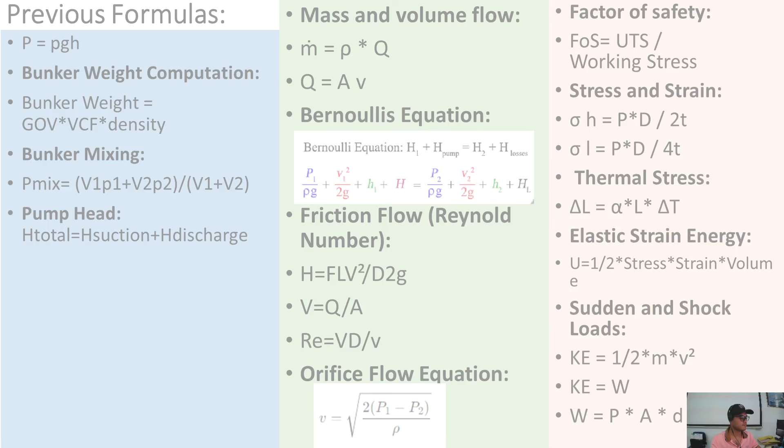So our next topic will be Learning Outcomes 3.2: solve problems involving torsion of shafts in engine room, pneumatic and hydraulic system. Our topics are fundamental torsion equation, torque stress relationship, modulus of rigidity, shaft torsion applications, torsional resilience, maximum and minimum torque in reciprocating components, crank effort, hydraulic steering gear, and helical spring.

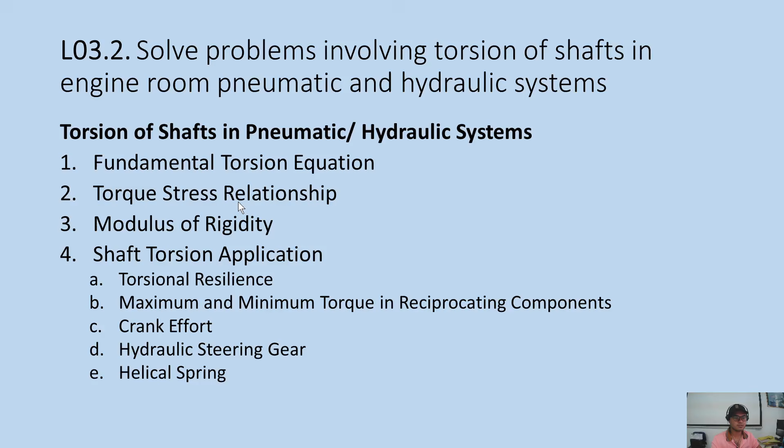Okay, let's start with torsion. Torsion acts to twist objects and material. It's the attempt to rotate the different parts of a material in opposite directions. So this part rotates clockwise, and this one is counterclockwise, so twisting happens. That is torsion. Usually this happens in shafts, in propellers.

For example, we have a propeller shaft here, so twisting or torsion happens there. Propeller shafts connect a ship's engine, here is the main engine, to the propeller which spins in the water and drives the ship forward. So these shafts have to be able to resist torsion, allowing them to transfer rotary motion without breaking or twisting.

So the material should not twist. The seawater applies a rotary force in the opposite direction to the engine, so a twisting force is applied to the shaft. The shaft needs to be able to overcome the twisting or torsional force happening to it, so you need to calculate it.

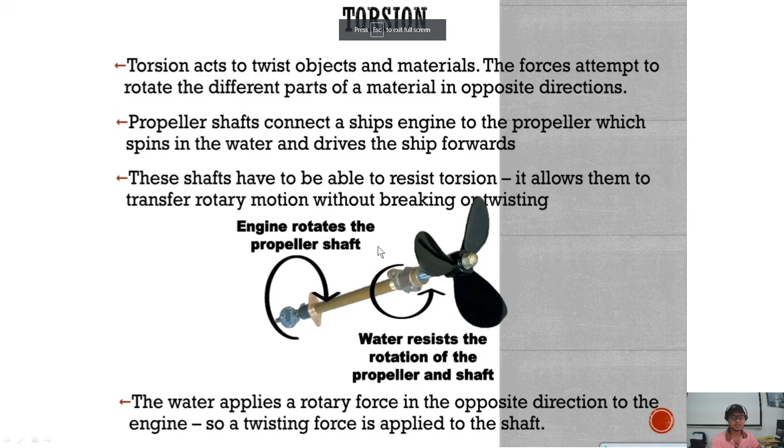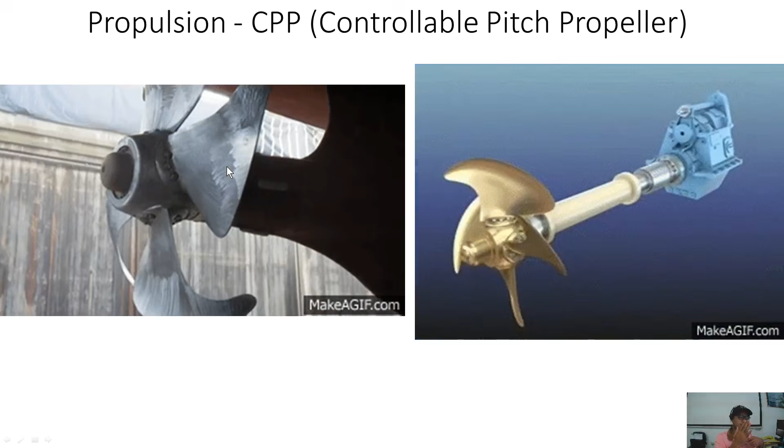Okay, ito yung dati, may mga bago ngayon na electric yung propulsion tawag. Ito yung azimuth thruster natin. Electric siya, driven. Meron siyang electric motor. And then electric din siya umikot or electrohydraulic. Umikot yan.

Yan, electric propulsion. So usually wala nang main engine na malalaki. Puro na lang generator yung nandoon sa loob ng barko mo. And then wala ka ng main engine. Puro generator na lang, may electric motor na malaki na ginagamit for propulsion para din umikot to dito. Meron yang motor din yan sa loob dyan para umikot yan.

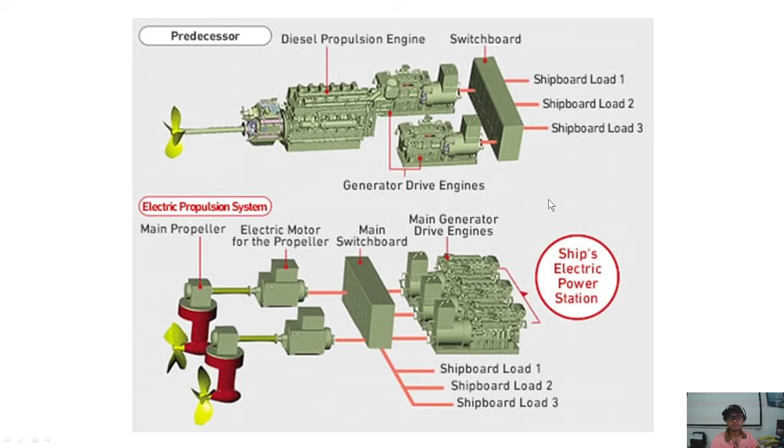Pumps. Of course, sa pumps, meron din tayong mga torsional forces dyan. Kasi as long as may umikot, meron torsional force, di ba? So, dito sa taas, meron tayong tinatawag ang tawag dito is lobe pump. Lobe. So, yan, parang tawag dyan. Parang circular yung dulo. Yan. Lobe. Tawag dyan. Yung iba is, ito, tatlo tong lobe.

Yung iba, dalawa lang. Parang yung mani lang. Peanut. O parang lobe. Ganun yung lobe. Parang letter 8, number 8. Meron din ganun. Lobe pump ang tawag.

So, ito is at lobe pump. Dito naman, meron tayong gear pump. So, gear pump to. Pero since yung isang gear ay sa loob ng isang malaking gear, so ang tawag dito is the internal gear pump. So habang umikot siya is dumadaan din yung natutulak din yung fluid papunta sa kabila. Yun. 'Di ba? Higop dito sa kabila, pupunta doon sa kabila.

Dito naman, walang torsional force dito. This is a diaphragm pump. So meron siyang parang diaphragm dito, yung itim na ito. Yung diaphragm na yan, kung saan siya itutulak, so nagtutulak din siya ng liquid. So pag, example, ito nga side, pag tinutulak siya pa left, so tumutulak siya ng tubig. Tapos pag hinihila naman siya pa right, so nakakahigop naman siya ng tubig sa ilalim. Higop, and then buga. Higop, buga.

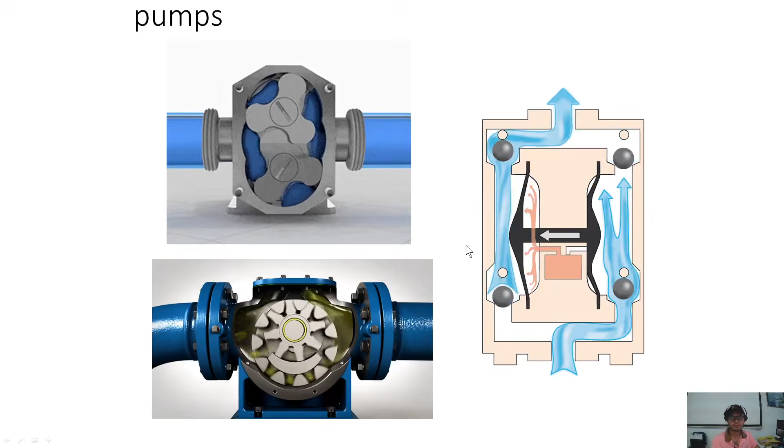So parang ganun yung diaphragm pump. Pero walang torsion nangyayari dyan. Kasi movement niya is axial movement lang. Ito, dito naman, we have here, ano ba to? I think this is a progressive cavity pump. Or kung hindi ito progressive screw pump to, hindi naman sure. So, parang screw siguro. Okay, screw pump. Pwede siya screw pump. So, umiikot siya, meron din siyang axial force.

Dito naman is para siyang isang, this is a centrifugal pump. Yan. Centrifugal pump. Yan. Ito naman, this is a vane ba tawag ito? Vane pump. So ito is para itong blades na yan, or hindi yan blades, parang vanes na yan, is nag-move out pag lumalaki yung area, and then

pumapasok din siya pag wala ng space. So habang yung iba dyan may spring, yung iba is natatapon lang dahil sa bilis ng ikot. So parang natatapon siya palayo dahil sa bilis ng ikot ng lalo na sa mga blower type na ganito, yung mga air driven or air yung tinutulak niya. So hindi siya pump, para siyang blower. So meron ganito mga blower type na nagsa-slide lang yung vane na yan pa outward. Ayan. And then yung hangin is natutulak dun sa kabila. Dahil sa bilis ng ikot niya, natatapon yung vanes palabas. So usually mga vanes na yan is mga gagaan lang, mga carbon lang na vanes.

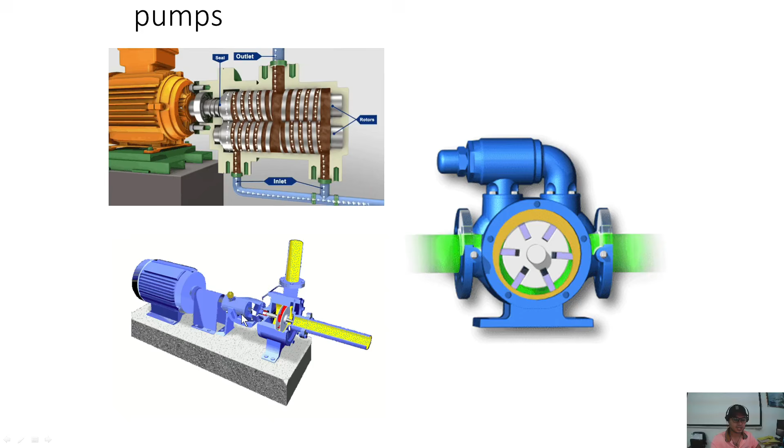Dito naman sa taas, meron tayong relief valve, 'di ba? Pag nag-overpressure dito sa kabila, so pwede siyang mag-recirculate dito para hindi masira. For example, naka-close yung valve dito sa discharge. So pwedeng umikot lang yung liquid, hindi masira yung ating pump or ating motor. Ito yung motor, ito yung pump, dito yung coupling sa gitna dito. Okay?

Electric motor din. Sa loob ng electric motor, habang umikot, meron din siyang torsional force or torsion or torsional stress.

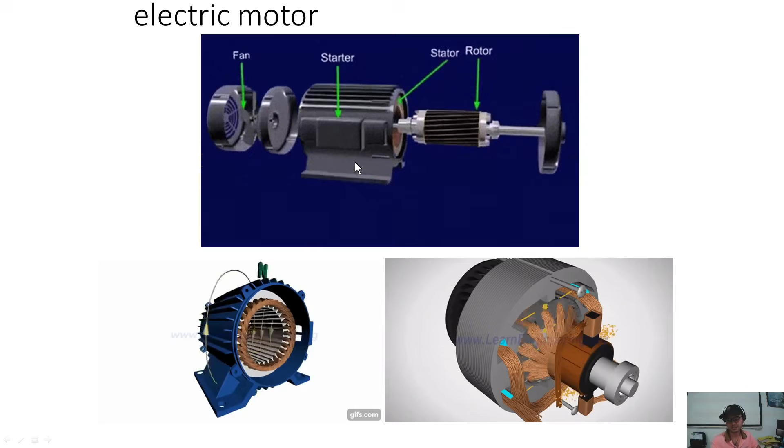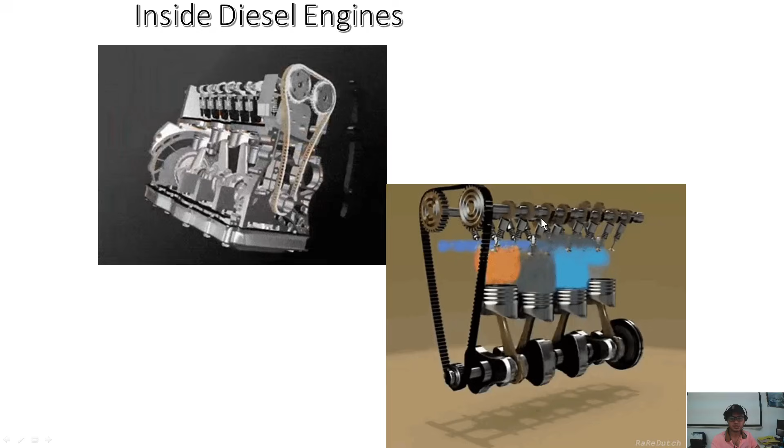So, dito, camshaft. Overhead yung camshaft nila. So, meron yan. Usually, pag ganito, mga overhead camshaft, usually sa mga sasakyan ito. Chain driven. Yan, 4-stroke. Yan, mga 4-stroke yan. So, yan 4-stroke. Ito naman yung 2-stroke. Malaki yung mga 2-stroke.

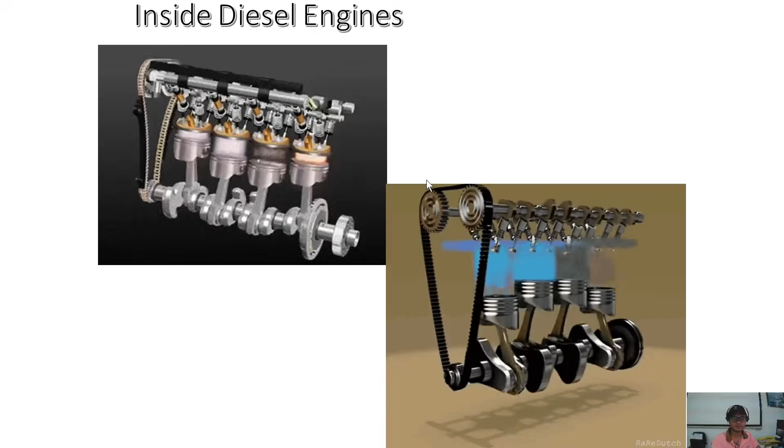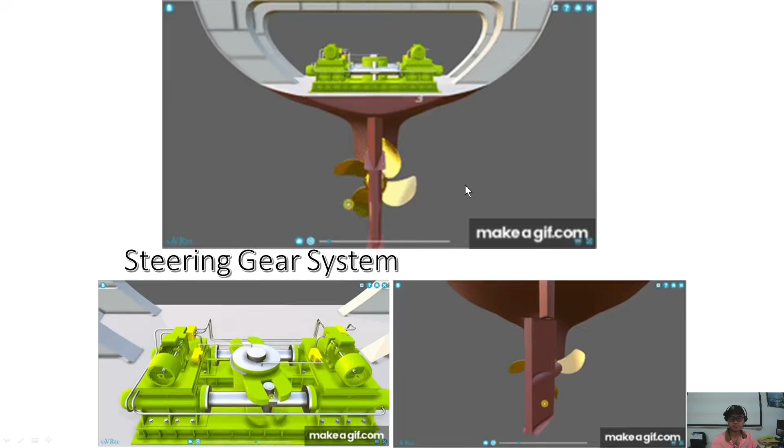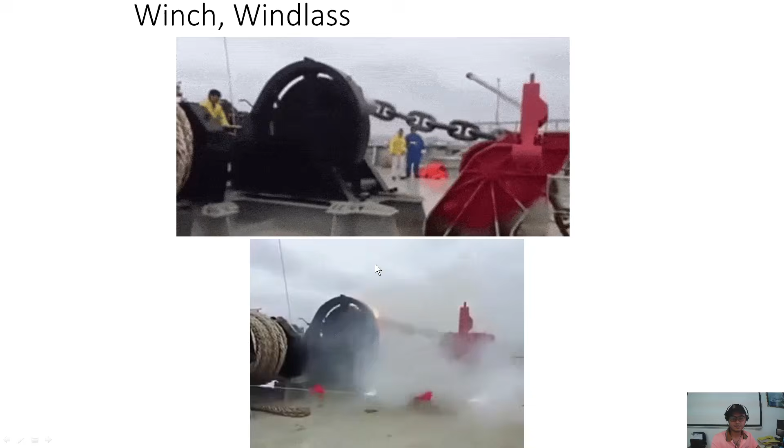Ayan, ito naman nasa loob. Yung chain is binabalik nila sa, parang ito yung locker, chain locker. So, binabalik nila sa chain locker yung mga chain na nilabas nila doon sa anchor.

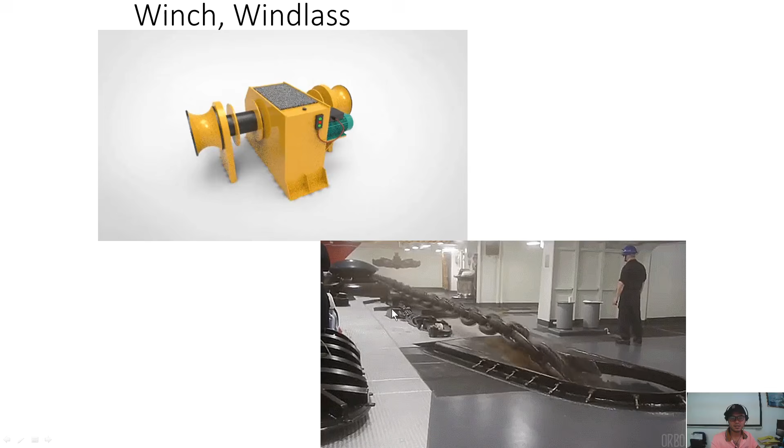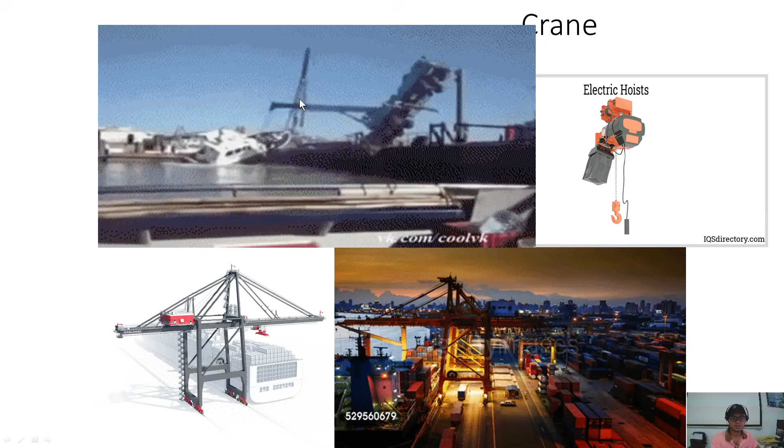So, dito may umiikot. Dito, meron ba umiikot dito? Wala. Yung motor siguro nagpapaangat dyan. Dito, wala naman. Masyadong torsion.

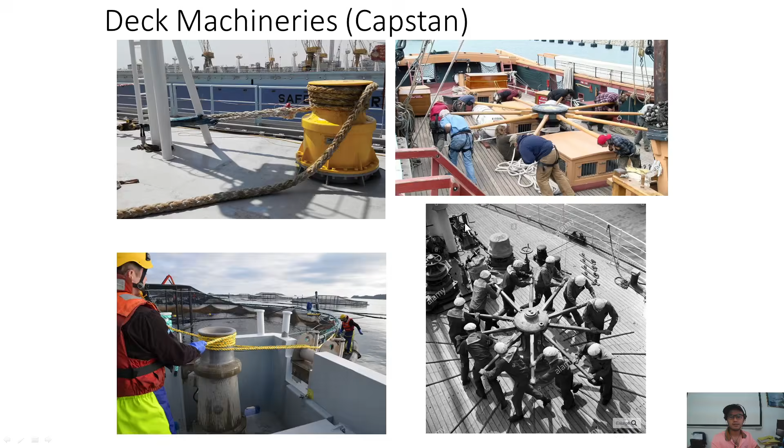Ito naman, rails and rollers. Ito yung rollers. So, dadaan lang yung lubid dyan. Iikot yan. Gagasahan mo lang yan. Wala yung motor. Hindi yan electrically driven. So, manual lang siyang umiikot talaga. Okay, yan. So, syempre, may umikot, may torsion din.

Dito, ito naman tinatawag na roller din to. Roller na cylindrical yung forma. So, sa gitna dyan, papasok yung tali. So, para hindi masyadong ma-pressure yung tali mo, magasgas palagi, mapuputol. May mga rollers. Ang ginagrasahan lang natin yan. Or ng deck. Depende. And ito naman, rollers, reels. Dito nakakabit yung tali. Reels and rollers. Yan.

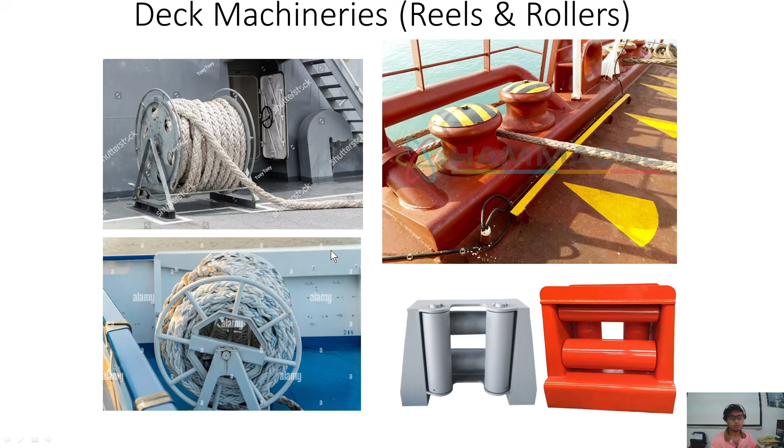So, yan yung mga possible may mga torsion na mga part ng barko natin or ng engine room. Okay. So, yun. So, ngayon, tingnan natin yung fundamental torsion equation.

So, ito yung equation natin for torsion. Torsion is equals to, or torque, T, is equals to modulus of rigidity times the polar moment of inertia times the angle of twist in theta or radians divided by the shaft length. So, L is the length. Okay? So, makita natin dyan, mas mahaba yung length, mas hihina yung torsional force. Diba? So, yan. Pag mahaba, yan. Tapos, yung torque is mas, ano to?

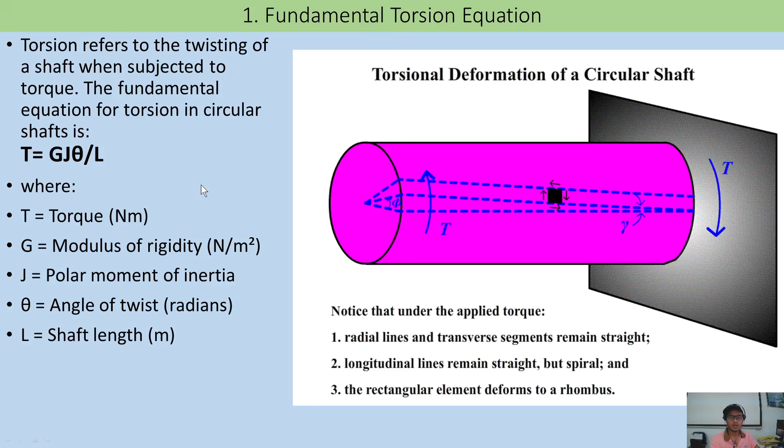So, that is the formula. Okay, yan. And then, meron din tayong ibang formula na parang, ito na kasi is derived formula na to. So, meron din tayong formula, hindi pa derived. This is the formula. Okay? Shear stress divided by radius is equals to torque divided by the polar second moment of area, which is equals to G modulus of rigidity. Yan, modulus of rigidity times the angle of twist or theta divided by the length.

So where for a solid rod, J is equals to pi d to the power of 4 divided by 32. So yan. So G is modulus of rigidity or shear modulus. So shear modulus din tawag sa iba. Yung J is polar moment of inertia or M. Yan, moment of inertia. T is torque or torsional rigidity. Pwede rin torsional rigidity yan. And itong anong tawag dito? Ano to? Shear stress naman yan. Parang letter T na parang slant also. Yan. So these are the formulas.

Yan. Kami ng formula natin. Okay, torque. So the magnitude of the torque, meron na tayong formula dito dati, force times radius, kung naka 90 degrees yung pwersa mo. Pero pag hindi naka 90 degrees, nakatakilid yung paghila mo, so meron tayong, ito yung original force formula niya, force times radius times sine theta. Depende sa angle ng paghila mo. Pero pag naka 90 degrees naman angle mo, since sine 90 is equals to 1, so good as parang wala na lang siya, parang negligible na lang. Pero pag mayroong given angle, so syempre, solve mo yan.

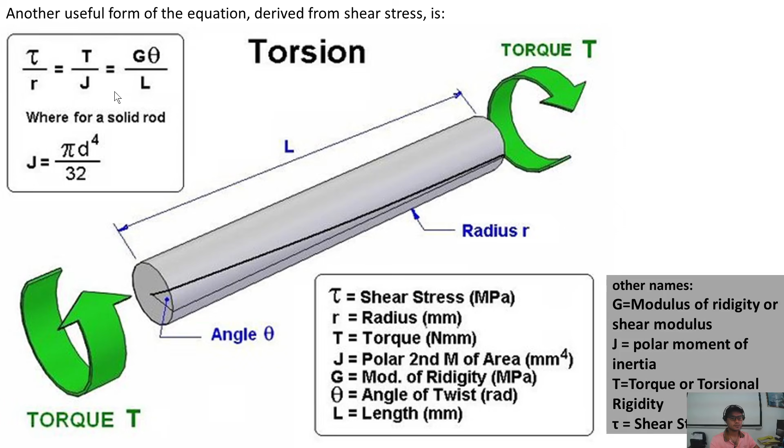So the modulus of rigidity naman is a material property that defines the material's resistance to shear deformation under applied torque. So para makuha mo yung modulus of rigidity equals shear stress divided by shear strain, or tawag doon G equals tau over gamma. So pag dito natin G equals to, wala dyan. Ito, shear stress over shear strain. Another formula.

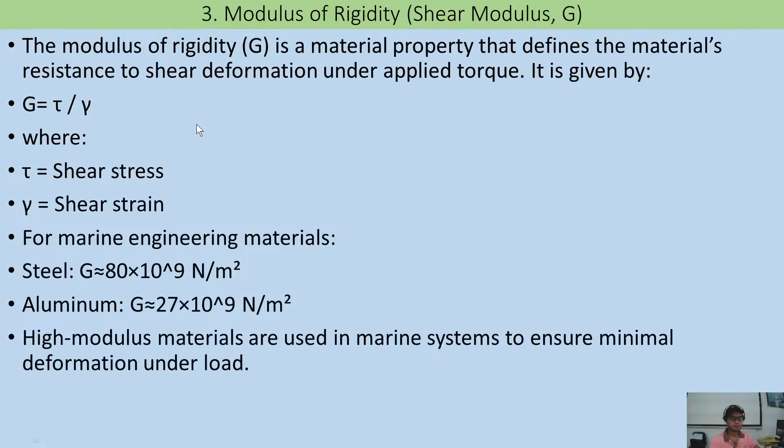So another one, torsional resilience, the ability of a shaft to absorb energy before permanent deformation occurs. So bago masira talaga siya or ma-deform na talaga siya. So meron tayong torsional resilience. Ito yung hanggang ilan yung kaya niya na hindi siya mag-deform yung ating shaft. So yung formula dito is U, which is torsional resilience, is equals to T to the power of 2 times the length divided by 2 times G and J. This property is critical in marine applications where shafts undergo cyclic loading, such as in hydraulic pumps and pneumatic actuators.

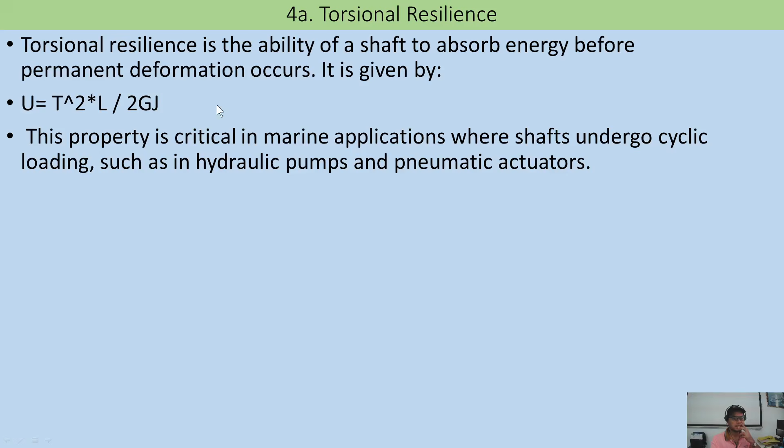Okay, what is torsional rigidity? It's GJ, there are many terms for this. The simplest definition: it is the resistance to twist. So that's torsional rigidity - how much rigidity it has, how much it can resist the torsion or the twist. So that is resistance to twist. Torsional rigidity is the product of shear modulus, G, and polar moment of inertia, J.

So this is torsional rigidity, T equals GJ, right? Let's check. T, let's write, equals GJ. So G is the shear modulus and J is the polar moment of inertia. It shows the resistance offered by material to angular deformation. So this is the twist, this is your torsional rigidity.

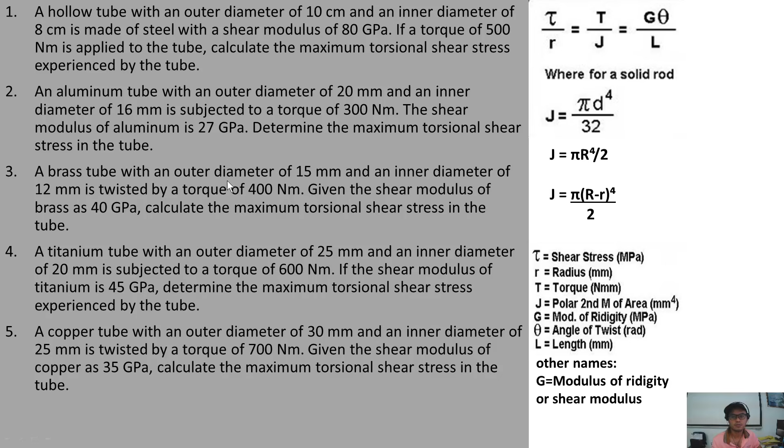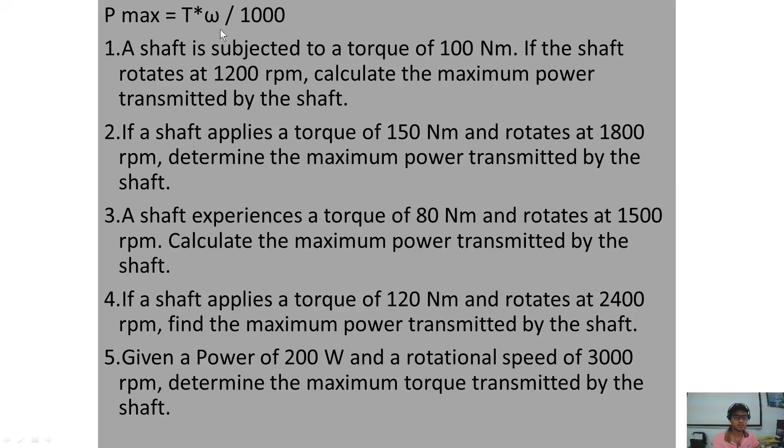So, a shaft is subjected to a torque of 100 Newton meters. If the shaft rotates at 1,200 RPM, calculate the maximum power - Pmax, maximum power transmitted to the shaft. This is easy, just plug in the values: torque and angular velocity at 1,200 RPM, then you can solve it right away.

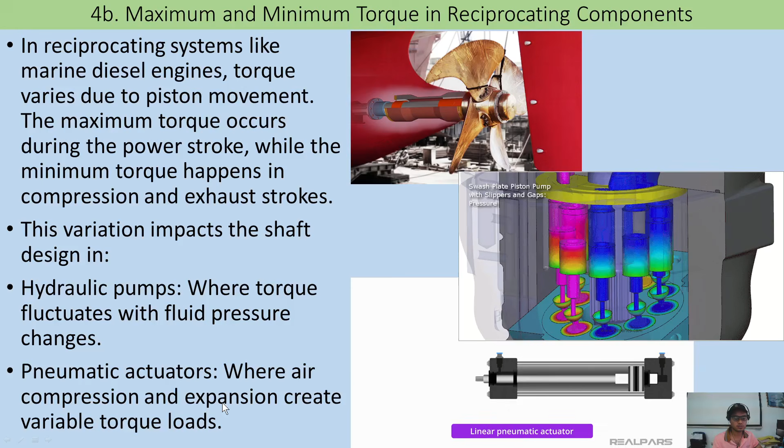Pneumatic actuators where air compression and expansion create variable torque load. So meron ding mga torque loads na nangyayari dyan.

Ano to? Crank effort refers to the torque exerted by the crankshaft due to gas pressure in engine cylinder. So meron tayong crank effort na nangyari pala dito, may effort din pala sila. Yung torque na na-exert during sa crankshaft, ang tawag dyan is the crank effort.

So yung crank effort, torque is equals to force times radius. Alam na natin yung formula nito. Force is the force exerted by the piston, R is the crank radius. Marine engines analyzing crank effort is crucial - ang formula ng crank effort is equals to torque is equals to force times radius lang din. Madali lang naman. Analyzing crank effort is crucial for ensuring smooth power transmission to the propeller shaft and avoiding excessive torsional vibration.

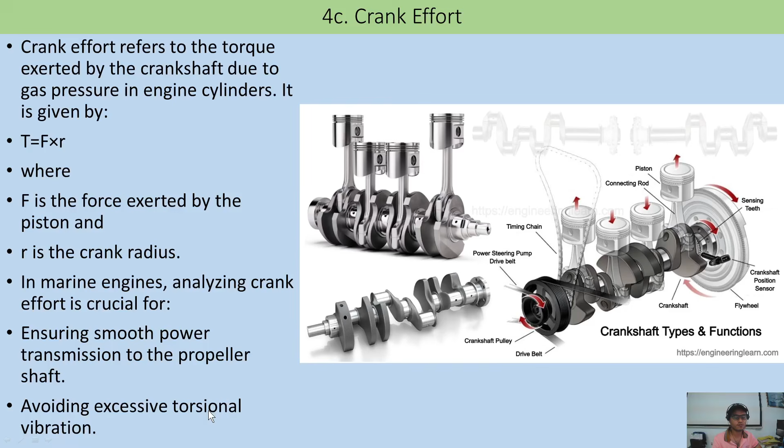Yan. Walang crank effort.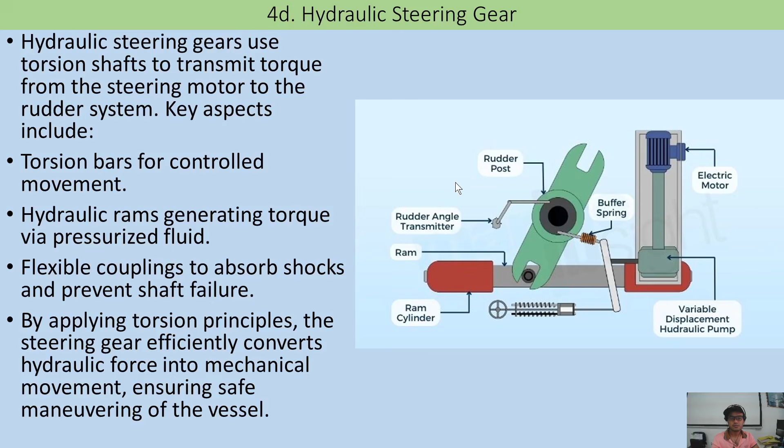So this is a simplified hydraulic steering gear system. Walang formula, okay, at least bawas na. Walang formula dyan. We have here a helical spring.

Helical springs are essential in marine engineering for energy storage, shock absorption, and maintaining tension in mechanical systems. In torsion application, the relationship between torque and angular deflection in a helical spring is: torque equals torsional stiffness times the angular deflection.

Where is this applied in marine engineering? This is applied in hydraulic valves. Helical springs return valves to their original position. We also have pneumatic actuators with springs that assist in smooth operation by counteracting pressure variation. Some pneumatic actuators are pushed by pressure, and when there's no more pressure, the spring returns it, like a spring return mechanism back to original position.

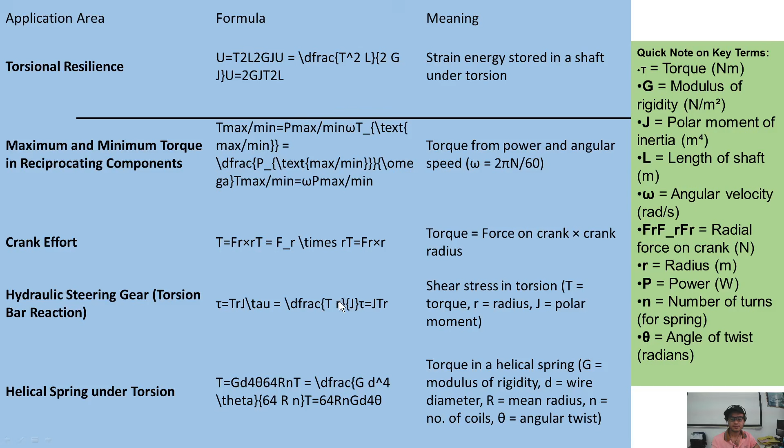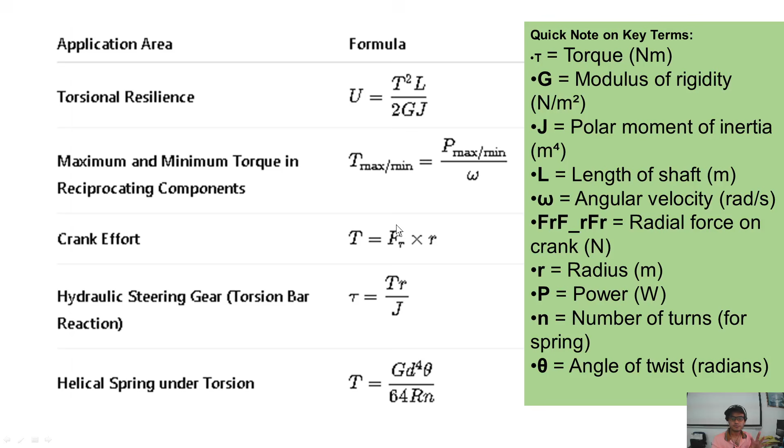Okay, we have here a problem. Sample problem.

A solid shaft 2 meters long with diameter of 80 millimeter is used in a hydraulic steering gear system of a ship. The shaft has power delivered equal to 50 kilowatts at 150 RPM from the hydraulic motor to the rudder stock. The helical spring has 12 connected number of coils, mean radius of 50 mm, and a spring's wire diameter of 10 mm. The modulus of rigidity G is equal to 80 times 10 to the power of 9 Newton per square meter. Find the torque transmitted by the shaft, shear stress in the shaft, strain energy stored in the shaft, and crank effort. Torque needed for the helical spring to produce a twist of 10 degrees.

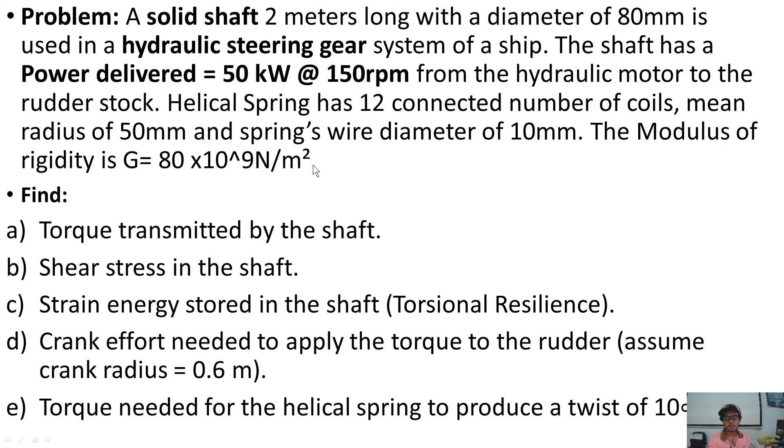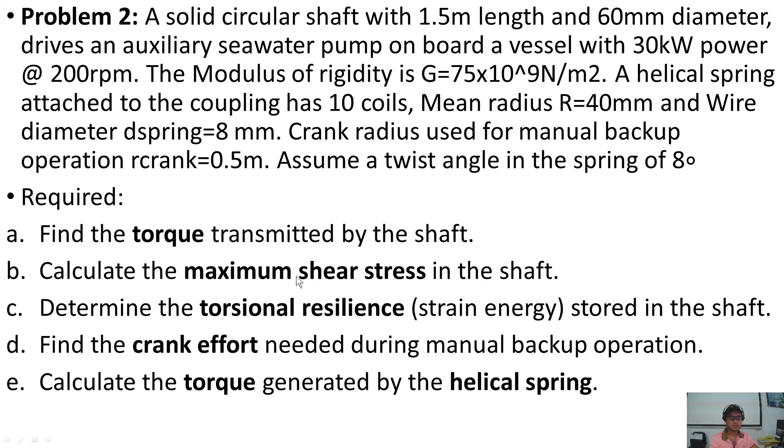Another problem we have here: find the torque, maximum shear stress, torsional resilience, crank effort, and torque in helical spring. These are the steps. Okay, check that. Just get the formula, plug in the given values, then solve.